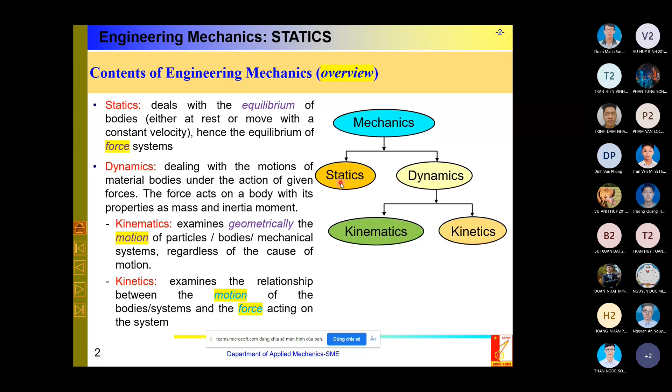Okay, so we have already said that the first thing we are dealing with is this chapter, the so-called force system. Force system theory. It means that we are interested in anything concerning forces. Again, I repeat from last time: what is a force system? A force system is a system of many forces which are acting on only one body.

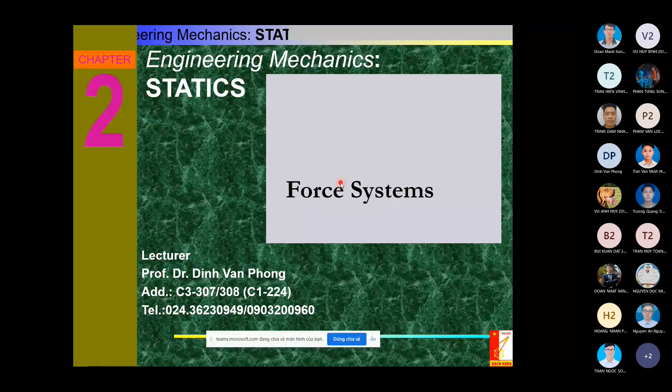The assumption that all forces act on one body is very important. It creates a basis for everything. After that, we can extend this force system to a system of many rigid bodies. However, in this case, step by step, we should take into consideration other assumptions. So at first, remember well that we are speaking about a force system. It means that we assume all forces act on one absolutely rigid body, no deformation.

So in this chapter, earlier, we defined the force vector. A very important characteristic of the force vector is the resultant force. Any force system can be reduced to two things: the resultant force and the resultant couple.

Last week, we already investigated the resultant force of any force system, and today we will start with the second very important property of the force system: besides the resultant force, we have the resultant couple, or resultant moment. With these two things, resultant force and resultant moment, we can reduce any complicated force system, and after that, with the reduced force system, we can consider if the system is in equilibrium or in motion.

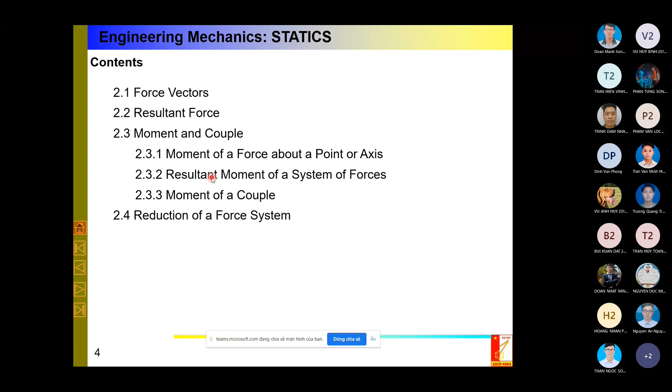Okay, remember well. Last time we studied the resultant force, and today we'll start with the second characteristic. It means resultant moment. And what is it? Last time we started with the resultant force. But at that time we hadn't defined the moment and resultant moment. So last time we specified only the resultant force of several concurrent forces. Concurrent forces means that all forces pass through one common point.

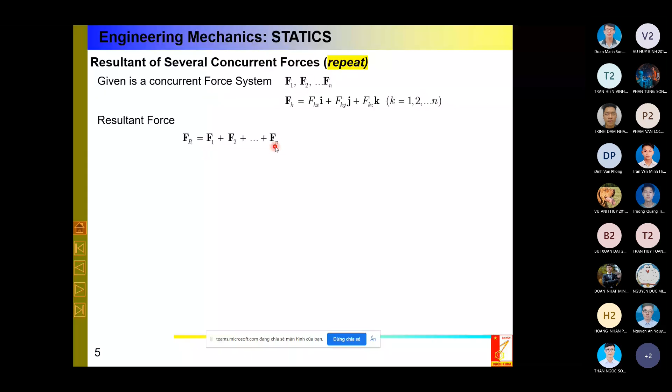You see here, if I have a force system which consists of F1, F2, and Fn, in a Cartesian coordinate system, because I use a force vector, I can use components in X, in Y, and in Z. And from this, I can calculate the resultant force by adding all forces, taking the sum of all forces. Okay, we have two methods to calculate the resultant force.

The first method is a drawing method, geometrical. It means that step by step I can use a parallelogram for two forces, F1, F2, and we have one smaller result. After that, I add the third one, and step by step I can add them. So I apply the parallelogram step by step with two forces. And rather than drawing the parallelogram directly, it is better to draw a so-called polygon. I will take one fixed point A here

and draw parallel lines. For example, first I draw F1 here. I bring F1 from the original position to this one, parallel. And at the end of this vector, I draw a parallel line with F2. It means that I bring F2 from the original position to this position. So if I draw the parallelogram, I will have one force here. After that, I draw the diagonal of this parallelogram. Then I bring F3 here, and I draw the diagonal of the parallelogram again.

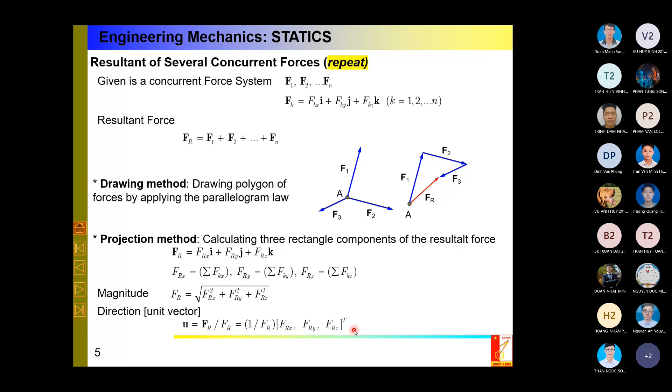Remember well, the unit vector shows the direction of the resultant force, but the magnitude of the unit vector is always 1. So if I have the total vector and the magnitude of the vector, I can calculate the unit vector of direction very easily. Or you can also find cosine alpha, cosine beta, cosine gamma with FRx, FRy, and FRz. Okay, it is only repeating what you have already done last week. And again, I emphasize why you are doing it.

The first thing we have already investigated, resultant force, and today we will do the second characteristic for the force system, the so-called resultant moment. With these two things, we can reduce any complicated force system. Later, not today, we'll see that any force system can be reduced to these two vectors, resultant force and resultant moment, and with these we can see whether the system is in equilibrium or in motion. In this semester, we take only the case where the system is in equilibrium. The rest is for the next course, next semester.

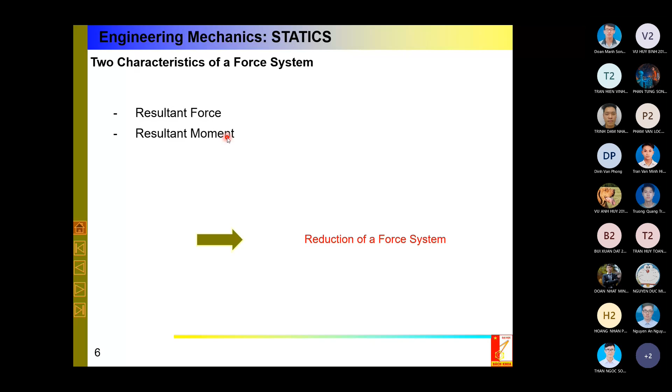Okay, so again, today we will deal with the resultant moment. The first thing, for calculating the resultant moment, we should define a moment. And a special case of the force system is a couple also. So we will define the moment of a force. Very important. Remember well. I repeat it. Moment of what? Moment of a force.

Moment of a force can be calculated about what? Two things: about a point or about an axis. Sometimes confusion about this leads to errors or misunderstanding for students or engineers. So why are we speaking about moment of a force about a point or about an axis?

It means this moment gives the body a tendency to rotate about one point or about an axis. After defining the moment of a force about a point or axis, we will define resultant moment, and after that a special case: moment of a couple. What is a couple? Maybe you know it from high school physics. It is quite easy, but today we will see an overview of everything.

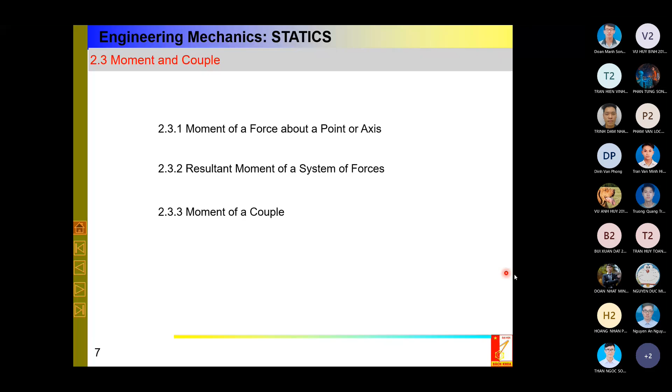Normally I denote this moment by MO, like a scalar. You can define it using algebraic or scalar analysis, or the second way, using vector analysis where moment is defined like a vector. But first, we define it like a scalar.

If I have one force with a line of direction, it means I have a line and one point, so I can construct one plane. You see here it is the plane of your paper or screen. Since I have one line and one point, from geometry you know that a line and a point together define one plane. So this plane in this case is the plane of this screen or paper. First, everything will be defined in this plane.

Select the case resulting in the maximum and minimum moment.

Here is the second question. Write directly, for example AB and AC. If you write, for example, 1A 2C or 1C 2B, write directly the answer.

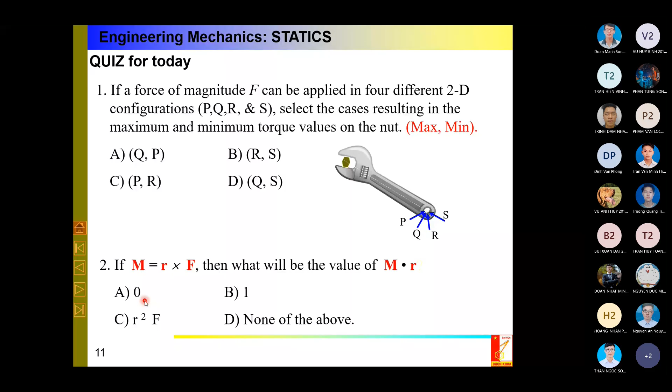So it's only for refreshment, instead of breakfast, we have the quiz. Quite easy for you. So after the quizzes, now we will have the real problem.

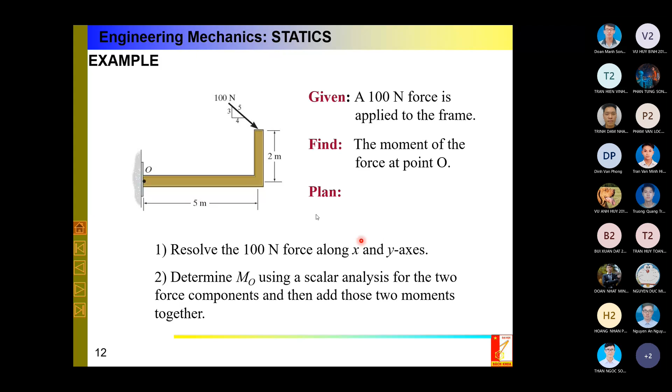One way is using scalar analysis. It means that you can calculate the distance of the force F from point O. However, it is not so easy. It is better to use a vector calculation, vector analysis. It means that I will resolve the force F along x and y component, and after that, with x and y component, I calculate the distance very easily.

So here I express the force F into components fx and fy. So you see, because I use trigonometry, I calculate fx and fy very easily. And if fx and fy, I can calculate the distance of fx and fy very easily.

It is 5 and 2 meters. So from this, I calculate it very easily with

460 Newton meter. Nobody wrote the direction of this moment. So even you have 460 Newton meter, nobody surely has it, because with this assessment here, it means that you don't have total or complete, 100% correct answer, because you should also specify the direction, it means that it should be clockwise or counterclockwise, sorry, clockwise.

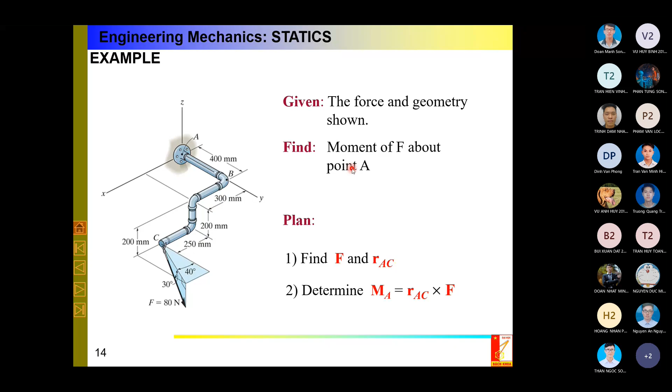And now we go to the second part of this moment. Okay, Mr. Hiếu, why do we have to use a cross product for 3D instead of dot product? Okay, Mr. Hiếu, why do you use dot product? It is from the definition.

Moment of a force about a point should be defined by cross product. Dot product does not give anything. It is not the definition. The definition of moment of a force about a point should be defined by using cross product. Dot product is another thing. Dot product, cross product, or other product.

It is only a tool, a mathematical tool for defining something. You can use it in physics, in mechanics, even somewhere in astronomy. But for mechanics, for defining the moment of force F about a point, the definition is MO is the cross product of position vector and F.

Okay, it is not dot product. Why dot product? Dot product is another thing. You can use the scalar calculation, but it is not a product. It is only one way to calculate it by using algebraic construction. But the definition is this one, R cross F.

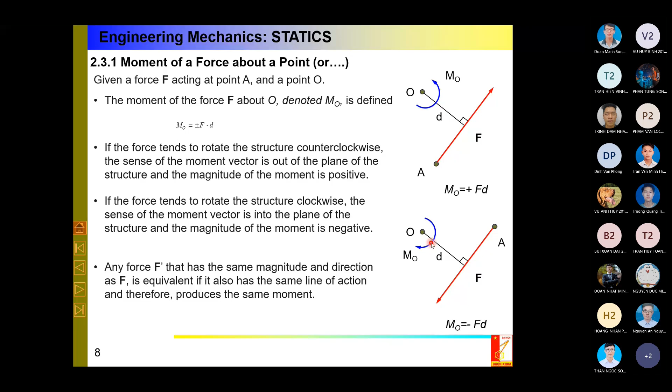If I use, for example, a scalar definition here and use the right hand rule, you see that the positive direction points toward us, and negative is towards the paper. Okay, and both definitions should give the same result, and this one is a cross product.

Mr. Hoàng Đình Lượng gives the piece of reply to Mr. Hiếu. Okay, but you should discuss in English because you are in an advanced course. It is not Vietnamese. I cannot understand the problem well in Vietnamese.

Mr. Hoàng Đình, okay, I see Mr. Hoàng Đình. Okay, what is this? Hoàng Đình Lượng. I check in the list. Where? Hoàng Đình Lương An, sorry, Hoàng Đình Lương An, okay. Good.

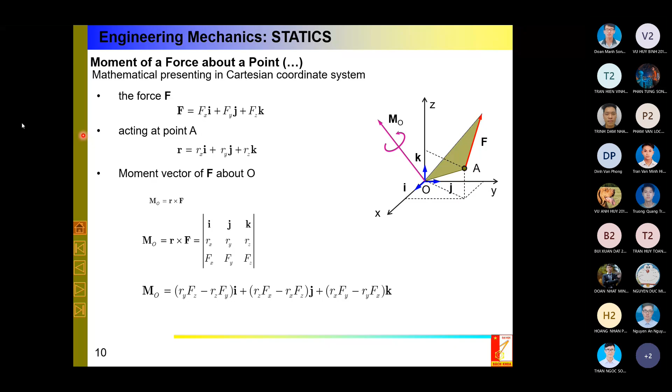Okay, we have already shown it. Mr. Hoàng Đình Lương An shows the picture. So again, I show this picture again. You have this one, okay. Good, but don't be upset if you have any problem. So ask me, okay? And after the lecture, you can ask your friends also, okay?

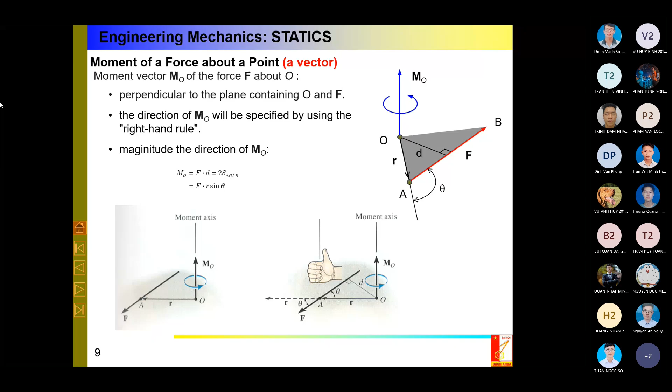And now we will go to the next, more important thing. Besides moment of a force about a point, now I will define moment of a force about an axis. How can we define it? Again, pay attention. I see many mistakes and confusion, like some minutes before when you asked. Here is the picture.

You see that I have the pipe, an axis here, and now I have a force. You see that the tendency and the behavior of this rigid body will be different if I act the force in this direction, or in this direction, or in this direction. The tendency of rotation of this rigid body about this axis is quite different in these three ways. So in this case, I should specify the moment of force F about this axis Z.

So what is this? The first one, here on the above picture, the first three pictures, you have the real case. But here in the mathematics,

okay, please switch off your microphone. Who is this? Okay, switch off microphone. Anybody? Okay, this is better. Don't forget to switch off your microphone.

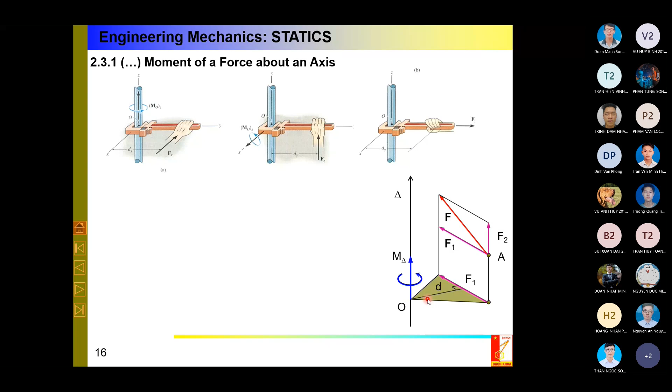So in this construction, I can calculate the moment of F about delta. It means the tendency of the rigid body to rotate about delta. However, it is too complicated.

So you see that the first definition is: the moment of force F about the axis delta, M delta, can be defined as the moment of this component F1 about point O. It is quite logical. It means that I project force F onto the plane P, which is perpendicular to the axis delta, and O is the intersection point of axis delta and the plane P. After that, I use the scalar definition to calculate it.

So you see again here, it is not a dot product. It is only scalar. A dot product means the product of two vectors. Mr. Trần Văn Minh Hiếu, even though we write F1 dot d here, it is not a dot product, because here F1 and d are scalars. A dot product is the product of two vectors. Maybe you are confused between the cross product and dot product. Even though we write a dot here, it is only scalar, or algebraic analysis, to calculate the moment.

However, you see here that sometimes the arm d cannot be found very quickly. It is better in this case to move to vector analysis, because not all the time, like in the previous cases, can I calculate the arm d quickly. So in this case, it is better to use vector analysis.

Again, I have an axis, in this case axis a-a, and I have a force here. Very general. Again, I draw the position vector from point O to one point on the line of action of F, and I construct r cross F. Now what will we do? First, I use a cross product again to calculate the moment of F about any arbitrary point O on the a-axis. This one we have done some minutes before.

On the axis a, I use some point O, and from this point I define a position vector. I calculate MO by using the cross product r cross F. This is quite easy, you can understand well. I can use a determinant. So you see here it is MO, the moment of force F about this point O.

After that, I project this moment MO onto the axis to get Ma. Only in this case do I have one vector, and the second vector is a unit vector, ua. Only in this case, I project it and use a so-called dot product, like Mr. Hiếu asked some minutes before. It is the product of two vectors. The first vector is the moment of force F about point O. The second vector, ua, describes the direction of the line a. So in this case, I use a dot product to get the moment of force F about axis a.

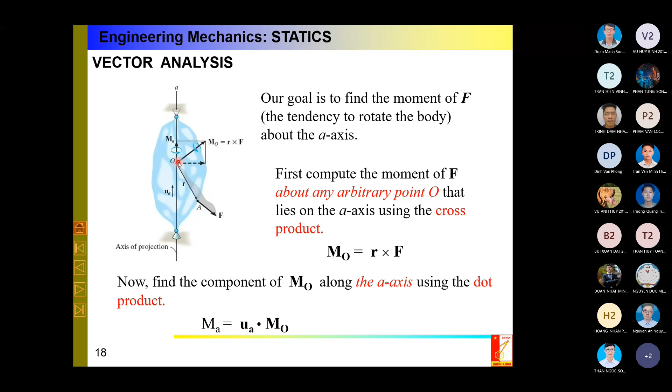I have a remark for you. Only in Europe or in America, they define it with one thing more. Besides the magnitude, I give the unit vector, so I have a vector. Okay. So step by step again. I have a moment of a force about this axis delta. Again, I have a force F, and now I have two steps.

First step, I fix some point O on this axis delta. And in the first step, I calculate the moment of force F about this point O by using the cross product. You see here, cross product. I can use either matrix representation or geometric representation, vector representation. Okay, cross product. So you see here, using the cross product, I have the moment of force F about this point O. Here it is a vector, and here's the tendency of rotating.

And now the second step, I project this moment onto this delta axis. Okay, you see again, in the first line, I use the dot product. It is the dot product. So I have a scalar. For the dot product, the position, first term or second term, is not so important. You can use UA either here or here. So you see that here, the definition in Vietnamese textbooks finishes. It means that the moment of a force about an axis is always a scalar.

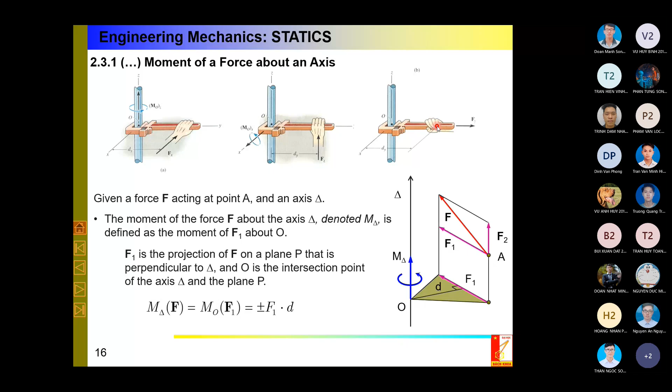Okay. So here it is a note, and I have already said to you, I can define the moment of F about an axis as a scalar, like in Vietnamese textbooks, and it finishes here. However, you can define it as a vector. If I take this scalar and use the unit vector in line delta, I have a vector also. In English textbooks, they use this definition, the so-called triple product. They use the cross product, the dot product, and after that one unit vector more.

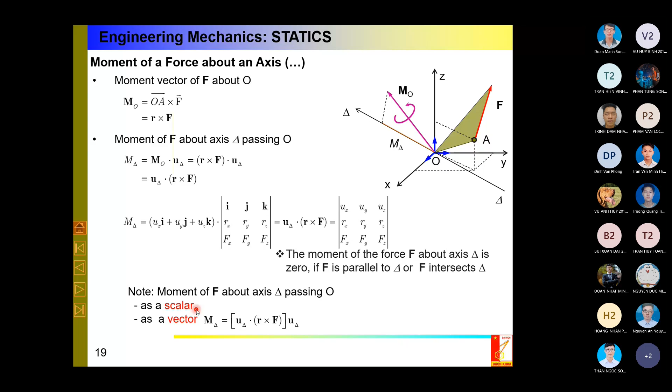You can see here. This triple product gives a scalar, only magnitude, and after that I couple it with the unit vector u delta. So in this case, I have a vector m delta. Okay, so it is a note for you. If you have a discussion with some friend or even some tutor in Vietnam, pay attention to this. Maybe they don't understand what you speak about, because in Vietnamese textbooks they always say that the moment of F about axis delta is only a scalar. Okay.

Okay, so we have an example. It is better to look at this, so we can do it after the break. Okay, for some students, go to break, and after the break you can do it. Or do you think it's better to do it now? Is a break better? No answer. Okay, 10-minute break. I think we can do it now. You can do it now. Yeah. So after finishing, we take a break. So do it. I give you some minutes to get oriented. Then we'll do it together.

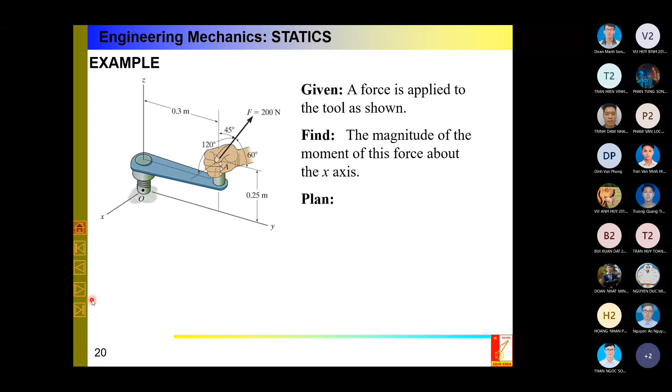Mx, in this case, you see that you will define it as a triple product: cross product, and after that dot product to project it onto X. Okay, specify a point O here. So I have a position vector from O to A, and after that specify a unit vector U in the X axis, and after that calculate the moment M. Okay. Here is the plan for you.

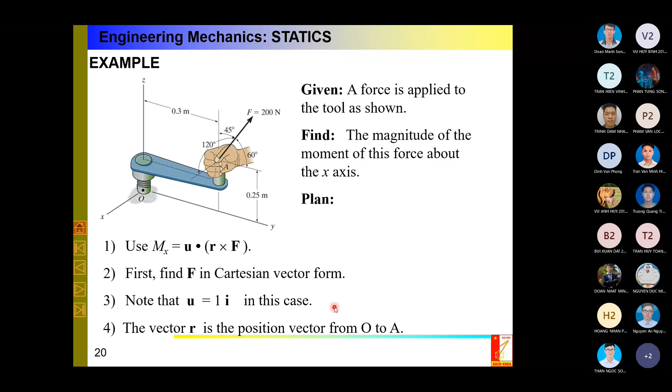Okay, so the unit vector for defining the moment about axis x is unit vector i. Okay, but now we will specify the vector for force F and position vector ROA. After specifying these two vectors from the geometry, you can use the triple product. First, cross product, and after that, dot product.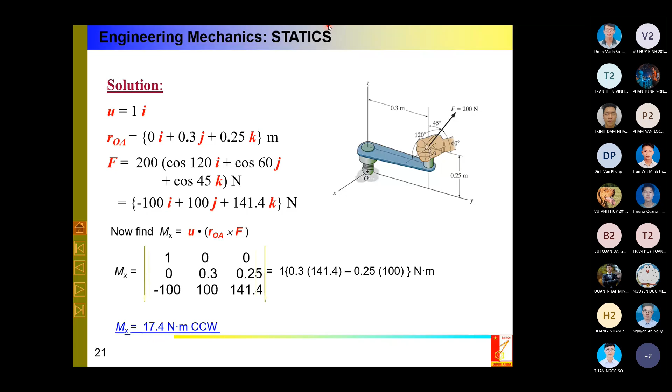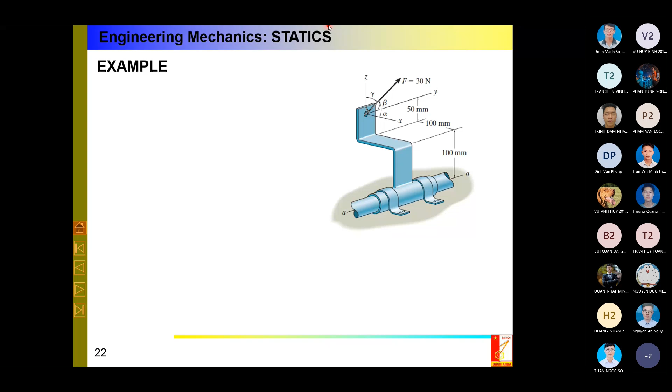Okay. We continue with the second example. This one. Maybe the same as before. Many students had good results. It is good preparation for the next portion. Okay. Again, I have force F. In this case, we have angles alpha, beta, gamma, and try to specify the moment of force F about this axis that gives the pipe of the bracket the tendency to rotate about this AA axis.

Again, the strategy is the same as some minutes before. We should specify the unit vector for AA, okay, the unit vector of this axis A, and position vector ROA, and also specify the Cartesian components of force F, and use the triple product again. So some minutes after refreshment from the break.

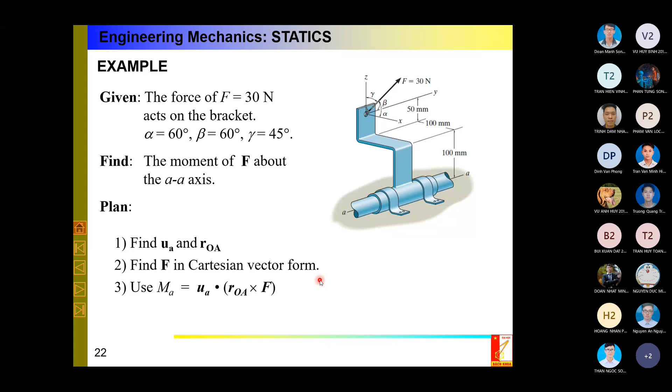Step by step. First thing, one unit vector and one position vector. AA is parallel to the y-axis, so it has the direction of axis y.

Mr. Trường Giang again has finished after 5 minutes. We are waiting for other people. Good. Mr. Nyan, the same result, however, with the opposite direction. Both the same magnitude. The same magnitude.

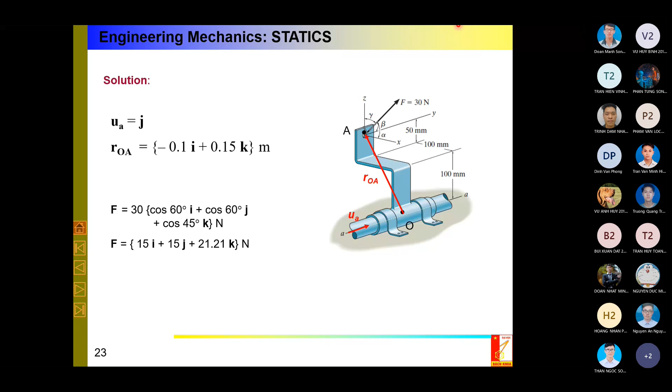Again, Mr. Buhay. Again, he uses a triple product. Okay, the first thing is a triple product, with the first row a unit vector, the second row a position vector, the third row the vector of force F. And after that, you can define very easily the magnitude of the moment of force F.

But you see that the result of the calculation is positive. It means that, again, here it is counterclockwise if you see it from the positive direction of the unit vector UA. So you see here in the picture, in magenta color, the direction of the rotation. You see that the moment really gives the bracket the tendency of rotation counterclockwise, because it is positive.

It is positive. So check it, for example, Mr. Bùi Hải Anh, Mr. Nguyễn Thanh Bình, check it. Why do you have the minus sign? Why do you have the minus sign?

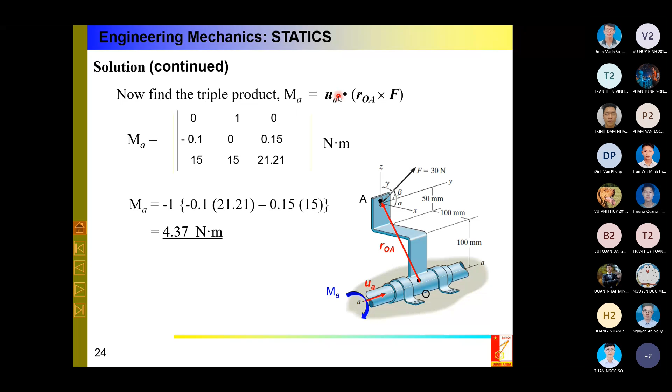Two examples are quite important from the point of view of mechanics. You see again the definition of moment of a force about a point, and after that, moment of a force about an axis. It means that normally I calculate the moment of a force about a point, any point on the line, and after that I project it on the line to get the moment of force about an axis. And this one is only preparation for the further step. First thing, resultant moment, and after that it leads to the reduction of force system.

So as we have already discussed some minutes before, besides the resultant force for any force system here, F1, F2, F3, and Fn, now we want to specify the resultant moment of a force system. Why we do it and what it is useful for, you will see later for reduction. But here, imagine that I have forces F1, F2, F3, and now I fix some point O, and I want to specify the total moment of all forces about this point. So this is the definition of resultant moment of a force system: the resultant moment of a system of forces is the summation of all moments of all forces about this point.

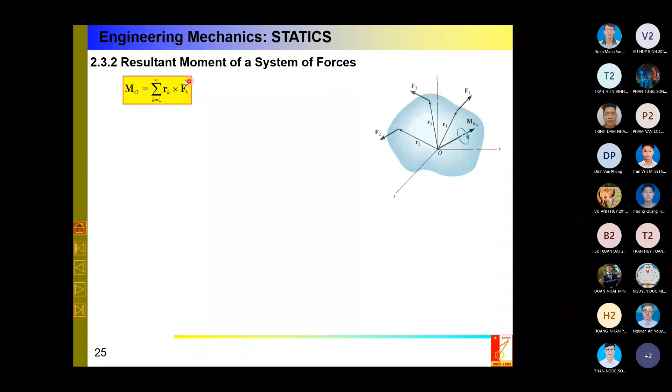Again, you see that for cross product the position of these two vectors is very important, which one is the first, which one is the second. So you see in the chat room, Mr. Nguyễn Thái Minh found the mistake himself because he wrote F times R. It is the cross product. For dot product, the position of the two vectors is not so important. However, for cross product, it is important. Because, for example, with the right hand rule, you go from the positive direction of the first one to the positive direction of the second one, and the thumb will show the positive direction of the result. So if you change the position of the first and second, surely the result is incorrect.

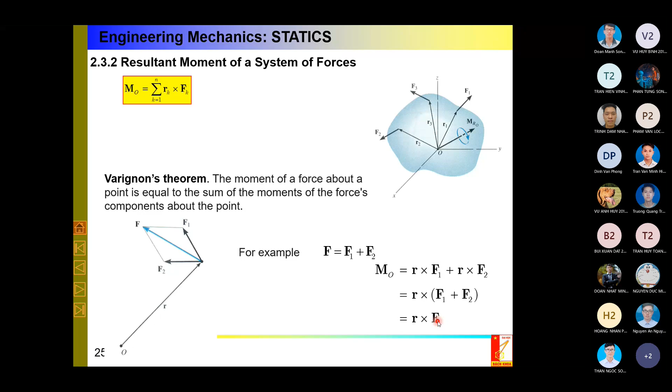Okay, now we will go to the so-called moment of a couple. What is a couple? It is a special case. You can say I have a force system which consists of two forces, F and minus F. It is a special case where two forces have the same magnitude, are parallel, and their direction is opposite. In this case, I can create the so-called couple.

And what about this? In this case, you can see later, or guess like an engineer. What's important for this couple is the moment of it. Maybe the magnitude of each component is not so important. Two couples should give the same behavior if they have the same moment. Maybe the force is greater, bigger, but in that case the distance between them should be shorter, and they should give the same couple. How do we define it?

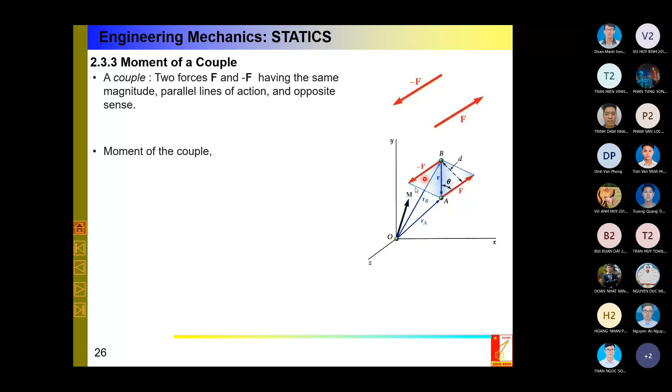You can write: if I have a force, and now I calculate the moment of this force about any point, for example point O, using the definition of moment of a force about one point. So I have moment of force F about point O, with point of application point A. And now I calculate the moment of the second force, minus F, with point of application point B. After calculating, R times F is the same, so I have A minus B, which is a vector from B to A.

So the result is very nice, because the moment of this couple is only the magnitude F times vector R, for two arbitrary points on the line of application. If I use scalar calculation, R sine theta, so F times D. So you see the magnitude, the moment of the couple, as I said before, is only the product of the magnitude F times the distance between these two forces.

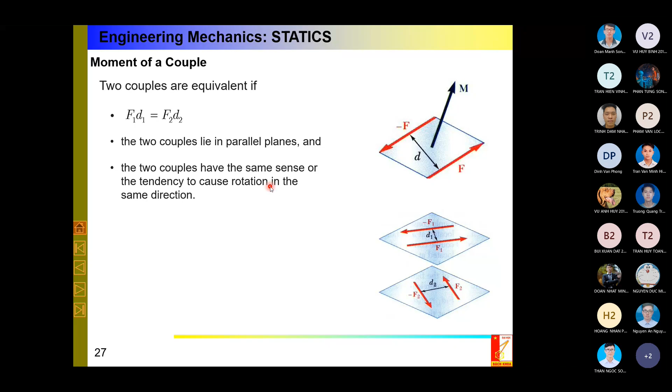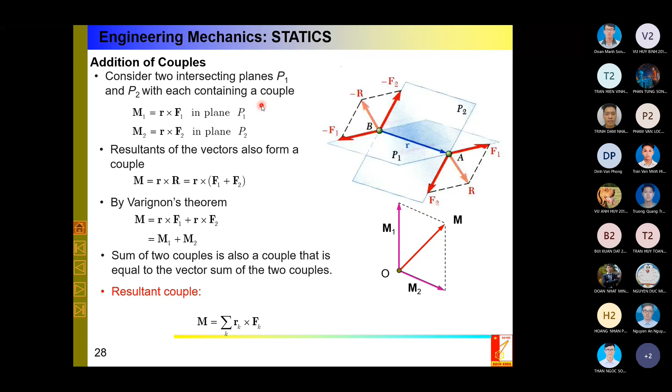Again, it is repeated by vector in many ways. You see here for your understanding. Here I have a coupler, the first picture, two forces at distance d. In this case, I can create one coupler, which is perpendicular to the plane. You see the plane here, consisting of the two forces.

So the plane, and the coupler is perpendicular to this plane. Magnitude is F times D. Okay, and if you have the vector, I can see the rotation, the tendency of the rotation, by using for example the right hand rule. And now, because it is a free vector, I can move the origin here, from here to origin.

It is quite maybe surprising for somebody, but it is not surprising. It is quite normal that it is a free vector, the same magnitude, the same direction. So in this case, it is not like a free vector or a fixed vector, it is a coupler. So I can move this vector of coupler from this point to this point. Quite easy, it is a very nice thing, and later you will use this property many times.

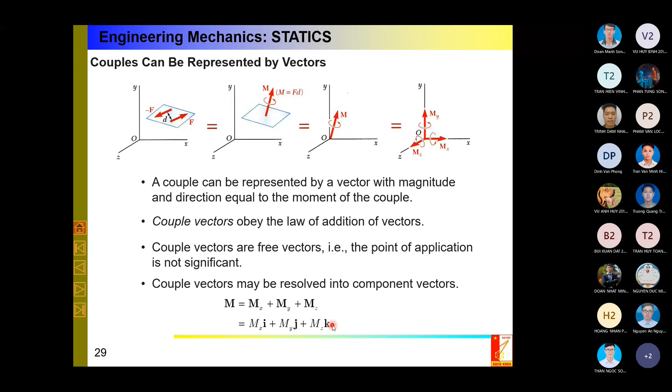Okay, nice things. Again, read at this at home and feel the nice thing of the mechanics. Okay, coupler vectors are free vectors and can be resolved, can be exploded into three components, Mx, My, and Mz. Nice thing.

And now, it is one example. Look, at first it is very simple, but now it is not so simple. If you, like an engineer, look at this, maybe you see that it is not so easy at home. And so you see that here you are really working with a rigid body, not like a point, for mass point. So I have two couplers. It means that each coupler is created by two forces.

The first coupler is F and minus F. The second one is 2 kilonewton and minus 2 kilonewton. So, in this problem I have already given you 2 kilonewton, and here I have F and minus F. So one of your tasks just now is to specify the magnitude of F, if the resultant coupler moment is 1.5 kilonewton meter, clockwise.

Okay, clockwise. Again, it is very important that with the coupler, I don't say above which point, because it is a free vector. It is a free vector. So feel the sense of this example and the sense of the topic of the coupler. Okay, do it. I will give you some minutes for orientation, and after that we will do it together again.

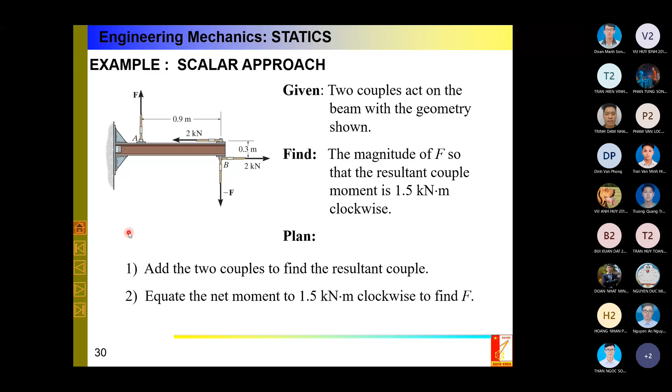Again, you see here we have a 2D problem, so it's quite easy to calculate the coupler, the moment of the coupler, using scalar analysis. Pay attention to sign, plus or minus, counterclockwise or clockwise. If you have a 3D problem it's too complicated, but all the time use the right-hand rule, that will give you the answer.

So in this case I get the moment, the total moment, resultant coupler of this. And because the requirement is to calculate for clockwise, it means it is negative, clockwise here. So by equating both sides and solving for the unknown F, we get F equal to 2.33.

At this moment again I emphasize, pay attention, because I take many examples from videos, but all the time it is important. I repeat it again, for online tests or quizzes it is important. In all of today's examples you see we have 3 significant digits. I saw that many students already, for example Mr. Phan Tung Son, had a result with 4. So pay attention to this. At this moment it's not so important because I don't require you to give a specific number of significant digits. Okay, let's move further.

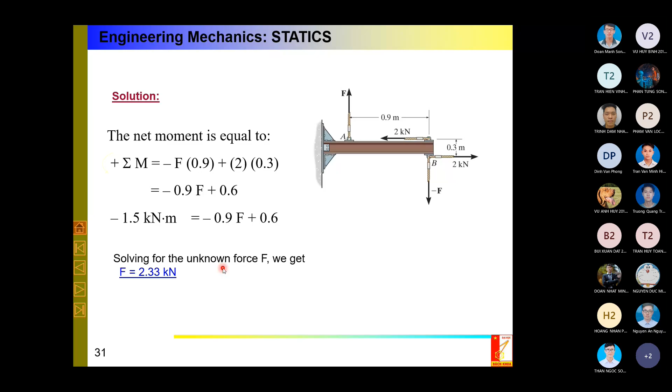What is it good for? Next time you will see a very, very important thing. What we have done today and last week is all preparation for this result. Any complicated force system can be reduced to 2 things: resultant force and resultant coupler. I have already said this at the beginning today. And after finishing this lecture, you are already able to calculate the resultant force from the previous lecture, and today you are able to calculate also the resultant couple or resultant moment.

You see here, resultant force is a summation of all forces. Resultant moment is the resultant moment of all forces about one point, about point O, plus all the couplers. C here stands for coupler, O here stands for moment of forces about point O, MO. So next time you will prove it.

You see that any complicated force system can be reduced to only two things. For example, here I have force F1, F2, F3, and any force, and any coupler M1, M2, and many things. So after that, I fix some point O here, I move all forces, I calculate all forces to this point.

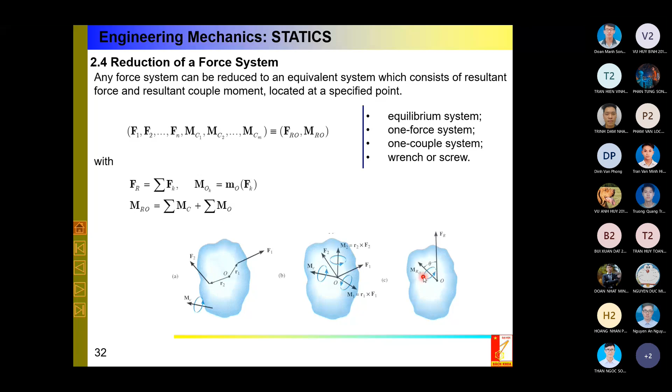So homework again, we explain it in some minutes. First thing, read the textbook, what I have already said. The topic from the previous week, this lecture also, and maybe it is a good thing that you read some pages more about the reduction of a force system in the textbook. Okay, I have already posted it. And also solve the problems in the small textbook.

Some students have already sent me, and if you have time, it is good. Many students have already sent. For example, 14 examples is good. Somebody asked if it is necessary to do 14 or not. It is good if you do 14, but it depends on your time. If you have enough time, you do it. You play with this. I don't say that you should, but if you have time, it is good for you to understand well, enjoy the problems, so do it.

Not even today's topic, but pay attention to this. When you send me, please send to my email address. Don't send to the team or to, for example, OneDrive. It takes me time; I don't have so much time. Please compress all your problems and send only one file. This morning, early morning, I saw that some student sent me 5 or 6 pictures. It takes me time to register it. Send me only one file. And in this file, please specify your name and class, because we have 2 classes, and we don't have any other student with the same name, so it is better.